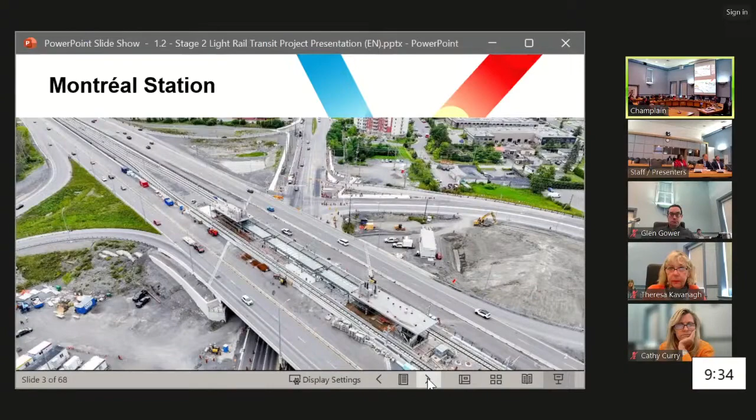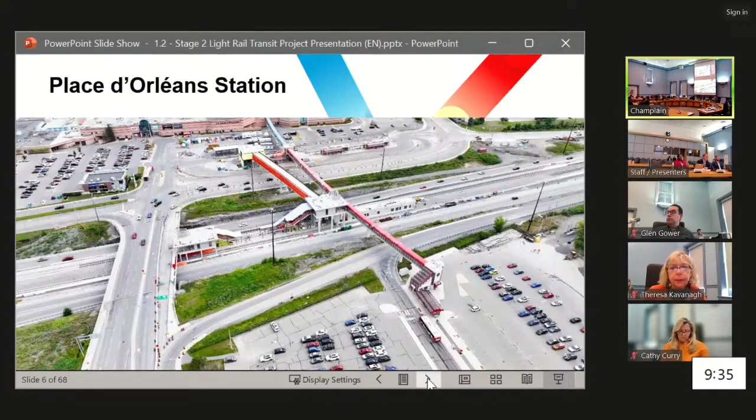So we're essentially putting those in now to future-proof the ability to come back at a later date with a pedestrian bridge. In terms of the look ahead on the east, on the next slide, we are working at all stations. There is good progress being made at all the stations. Rail was completed, and there's some final surfacing and adjustments being made.

The next big thing that you'll see is the overhead catenary system go up. A lot of the poles close to Blair are in place, but we're starting to pull the wires in. We need to make the connection from Blair all the way to Montreal station, and then at that point we can start doing some testing.

We are still trying to target an initial vehicle out to that area this year. We are seeing some pressure on the schedule - the Hydro Ottawa strike meant we needed power to the traction power substation at Montreal Road. Hydro Ottawa is back, good news, and so they are helping us, and we are trying to catch up a little bit there. So still targeting the first train movement out to the east this year.

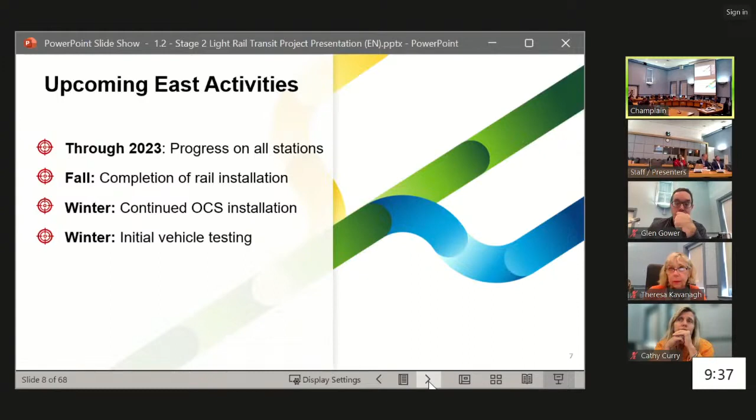Let's talk a little bit about the west. We've been making good progress on the west. The first location is Westboro, probably one of the stations we've really just gotten started on. A lot of work here, but soon you will see the station contractor mobilize in this area and start to get going. You'll see a lot of activity at this location.

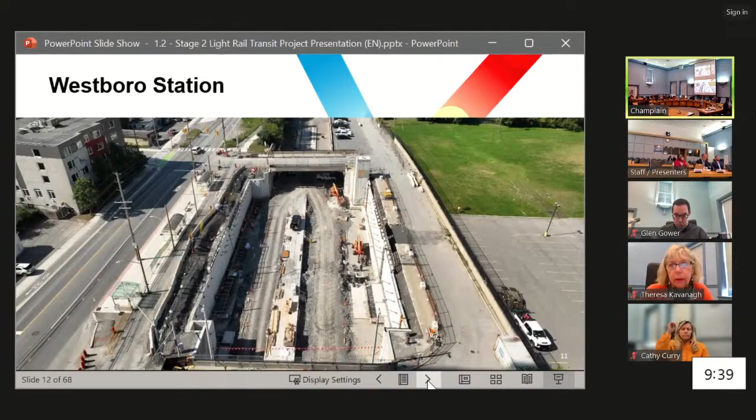We go down to the next slide, the Parkway Cut and Cover Tunnel.

We're in the mode now where we're over halfway complete to the tunnel structure, and we're starting to backfill. As you watch through these next few photos, you'll start to see them actually having covered up the tunnel. So we've definitely gone over the hump there in terms of the work activity, and we're starting on the downhill side now of trying to cover that up and finish it up.

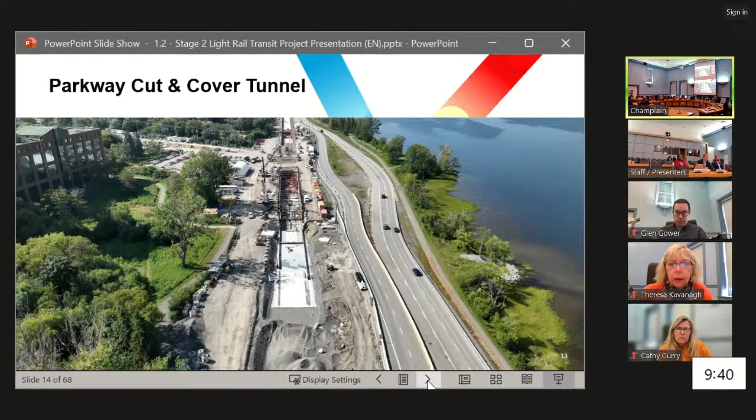This whole section along the parkway is planned to be closed in by the end of this year. There's 2 segments left on Byron Linear Park that are kind of later in the program, but those should be closed up early next year.

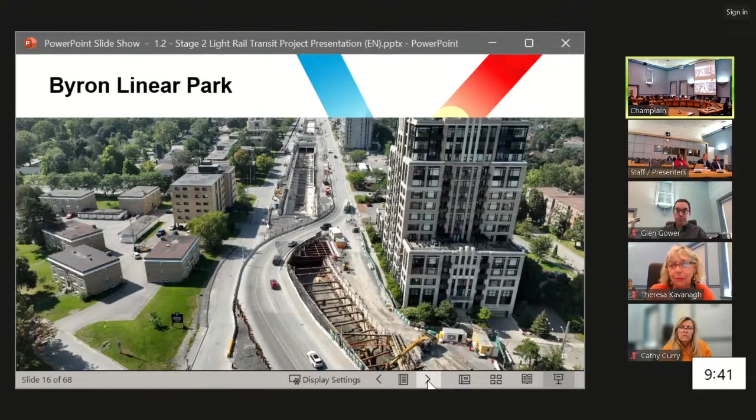Then the next slide, we turn the corner into Byron Linear Park. This is zone 12. What you don't see on the photo is the West Nepean Collector, which is a major city utility right under that location. So this is a sensitive area. We're taking our time so as to not disrupt that collector. But this will be one of the last sections to have the tunnel filled in and built out.

Next slide shows you a little bit of the fill in there, I think that's Woodroffe, where we've already taken out the temporary bridge and filled it in, and you see the tunnel there starting to fill in.

Obviously, the big thing that happens next once the tunnel is built is that there is a plan to essentially rebuild Richmond Road to make it a complete street. So we just spent the last 3 years digging through this area, and we're going to spend the next 2 years rebuilding Richmond Road to make it into a complete street, rebuilding the park, doing all the landscaping in the park. It's going to look fantastic when it's done, but still lots of work in this community in the years ahead, I would say.

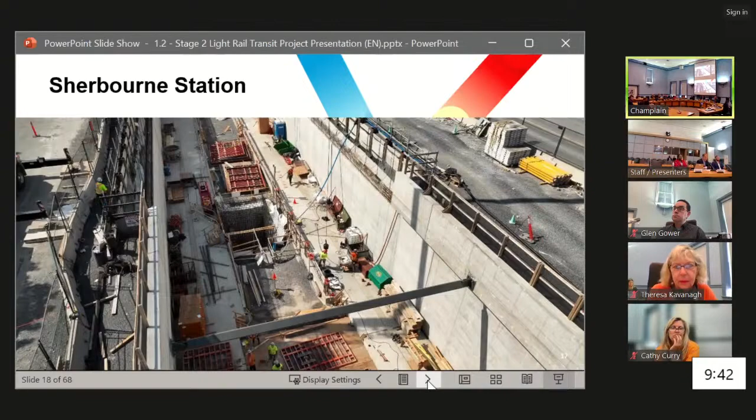And then once we get out of Byron Linear Park, then we're at the Richmond Portal. This is where the train comes out of the underground section up into the open air section.

Quickly to the next slide, you see Lincoln Fields. This is actually a three-track station, so this is one of our more complicated stations in terms of operations. On the left-hand side, you see a new bus operator building coming together nicely. Essentially the entire bus loop that's on the bottom, on the right of the screen, will be moved to the upper left. It's at a slightly higher elevation, and all the buses will use that top section. Again, we'll have a fare paid zone where people arriving at the station on the bus will be able to transfer directly into the station without going through fare gates. And then everything on the right at the bottom, that will all be dug up and turned back into park area.

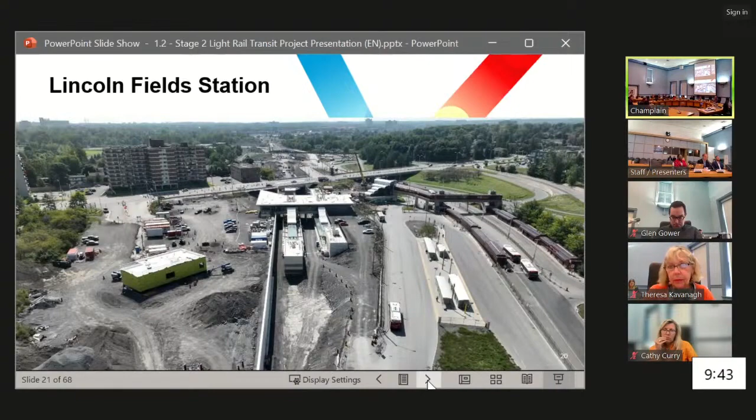We go a little bit further up to the next slide on Iris Station. This is following the leg up to Algonquin. This area from here all the way up to Algonquin Station is an area where we're actively putting in drainage and actively working on what I always call the sub-ballast. This area was highly affected by the big storm that we had. When we're in the middle of construction, we don't have the drainage systems in place, so getting a major flood is no good. We've absolutely lost some time in this area.

Previously the cut and cover was the longest path on the project. This is becoming a challenge for us as well, because basically a lot of the work that they did got undone by the recent storm. So pretty unfortunate, but we are moving ahead to try to get this work done as quickly as possible.

Algonquin Station, the next shot. Again, looking very good. I think Algonquin looks good. We have the pedestrian bridge in there, so they are doing temporary lane closures to get that work in place. Inside, they're doing finishing works. The main structure of the station where the trains arrive is actually underground at this location, so this is a conversion of an existing facility that was never put into use.

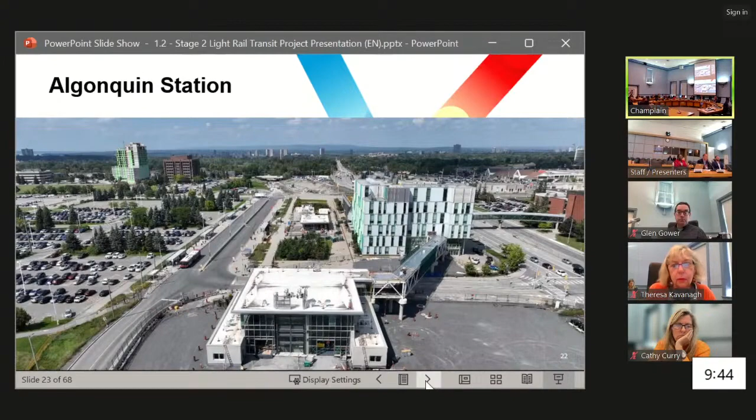Good progress there. Now if we go back, we take the leg - we just did the north-south leg to Algonquin. Now this is the leg that cuts off towards the west. We do have another small tunnel through this area that connects over to Queensview Station.

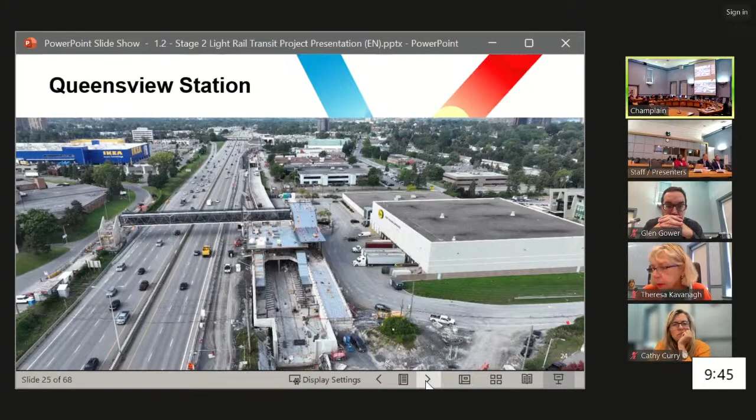So on the next slide, you see Queensview Station there, with the pedestrian bridge. Again, there are lane closures here required on the 417 to allow us to put in glass panels and other things. You see the station there is in very good shape, it's coming along nicely.

The next one at Bayshore Station. There was a bit of a challenge here - there is an underground tunnel to provide an additional emergency egress path, and that's the black spot you see in the middle of the page there. But once we have that piece done, we'll basically be able to connect track all the way through to Pinecrest, just about. So good progress there.

And then the next slide, Moodie Station, coming along nicely. Again, no major issues to report here. It's a pretty isolated location, so they're just working away, getting that station finished.

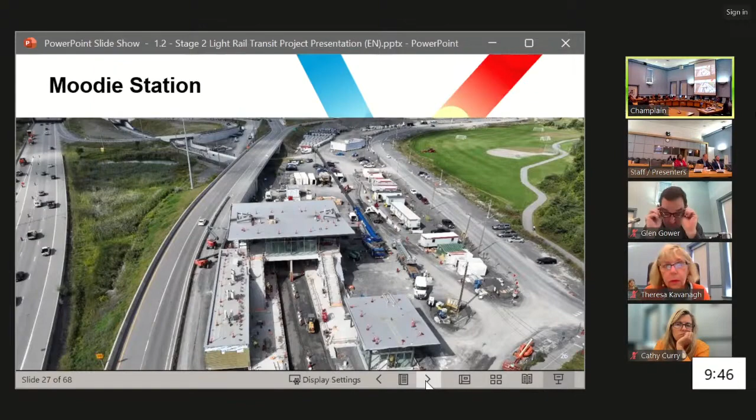And then the last one is the light maintenance and storage facility. They've moved in to put in track. They're going to work on track through the rest of this year and then start to put catenary in next spring. And then the plan is to truck one of the existing Alstom Citadis vehicles to this location to allow us to start testing at the facility.

Just in terms of the next slide, we talk a little bit about the look ahead. So it's really about filling in that tunnel, getting our first train trucked over to the LMSF in the spring or summer of next year to start testing. And we're actually going to test from west back to east because we need to finish the tunnel before we can test in that area, but we're going to try to mitigate as much as possible by starting in the west.

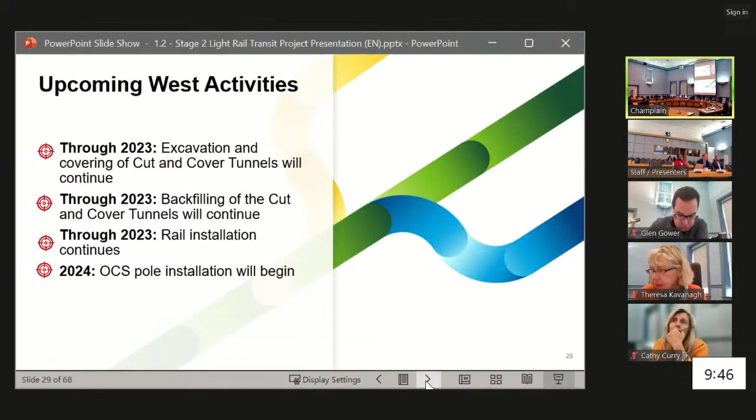And then I know we've talked a lot about traffic mobility impacts throughout the area. So we have a number of long-term closures. The one on this list that we're still tracking very closely is trying to understand when we can open up the Pinecrest interchange. We've closed the westbound off-ramp for a couple of years. We are working hard to open up a single lane westbound off-ramp, but it's going to depend a little bit on weather - if we get another big storm, that may affect the schedule. So we know there is interest in that lane reopening, and we are trying to do that this year.

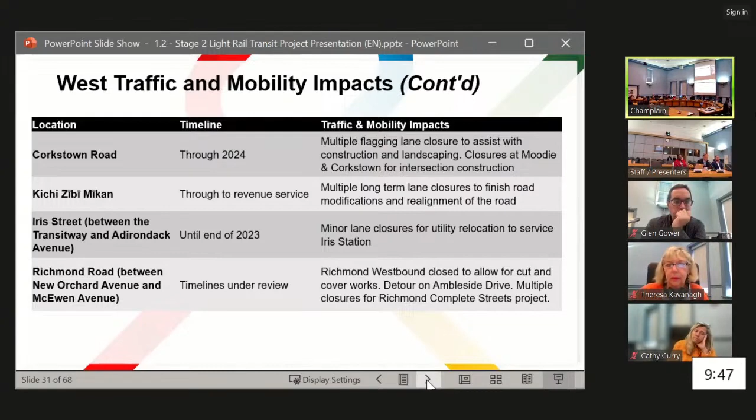And then just on the next slide, some additional impacts on the parkway and other areas. We are going to see a variety of closures on and off, and certainly when we have to rebuild Richmond Road, that will have a big impact on the work in that location. And then the next slide, if we just talk about schedule, still looking at the end of 2026 for the works to be completed. So that's a quick summary of where we are with the east and west.

Now we're just going to take a second here to set up with a video. So we have a drone flyover of the entire guideway, and it's really good at giving you a sense of the scale of the project, the amount of work that's been completed, and the amount of work that's left to go. So we'll bring that up, and then I'll give you a bit of a narration because this video does not have music. Yeah, so just settle in because it is 8 minutes.

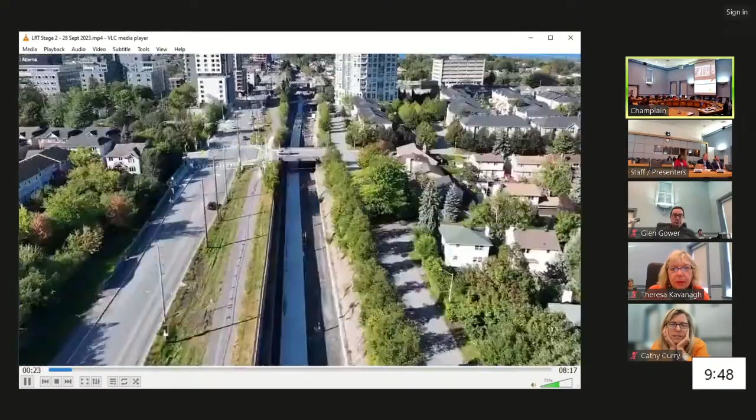So this is just leaving Tunney's. We start to, there's a big box culvert in the guideway here. That's on the left-hand side, that's the concrete pad that you see there. So we're going to be putting direct fixation track on that. Then the right-hand side will have ballast track.

You see we come through to Westboro Station. And then again, here's another big long section of transitway that's been converted, is in the process. So this section should largely be ballast. We get to Kitchissippi Station.

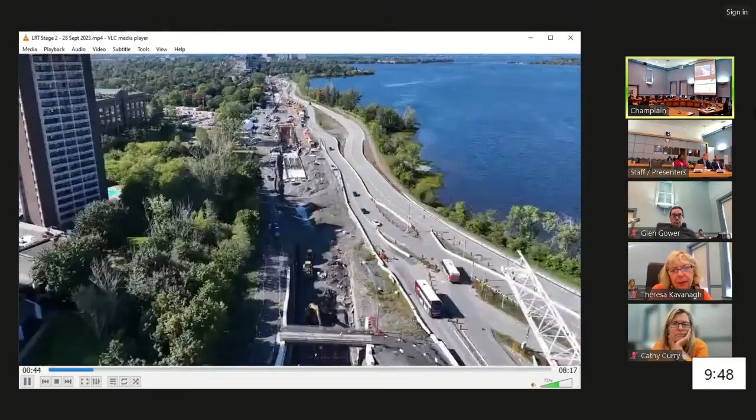And then we come out, this is where the tunnel portal will be, just at the start of the parkway. And then you see, here's a good shot of where we started to backfill. The white section there is the waterproofing, so that can all be backfilled now. And then there's a bit of an open segment.

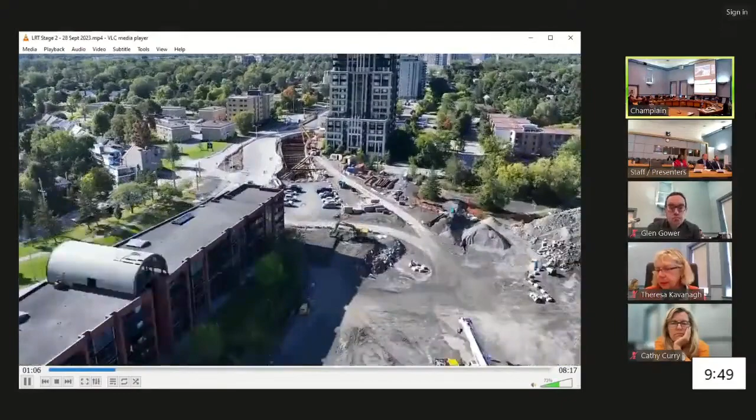This section here had a major east-west 1200 millimeter water main that took a lot of effort to resolve and work through. Another station.

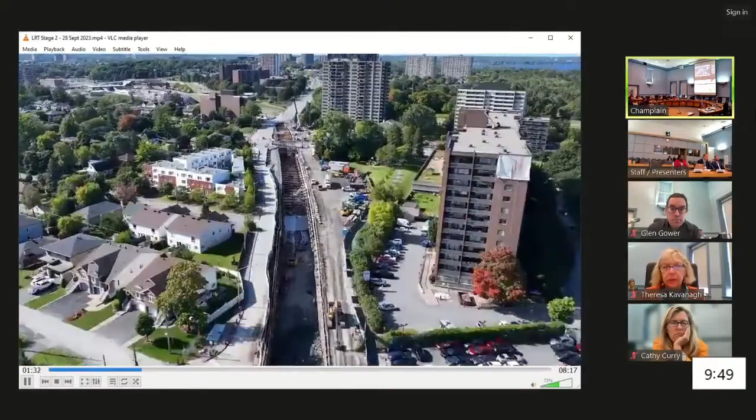And then you see a couple of small gaps here. This is where they're putting in, they have to do special concrete work to put in niches for the fans. So this whole area will basically have a tunnel ventilation system, a series of jet fans that are used to evacuate air in the case of a fire, a train fire. So highly unlikely, but that is kind of typical for these modern tunnels to have that system.

We turn the corner back through Lincoln Fields. You see there's a bit of a stockpile there that needs to be removed to build the guideway. Lincoln Fields Station.

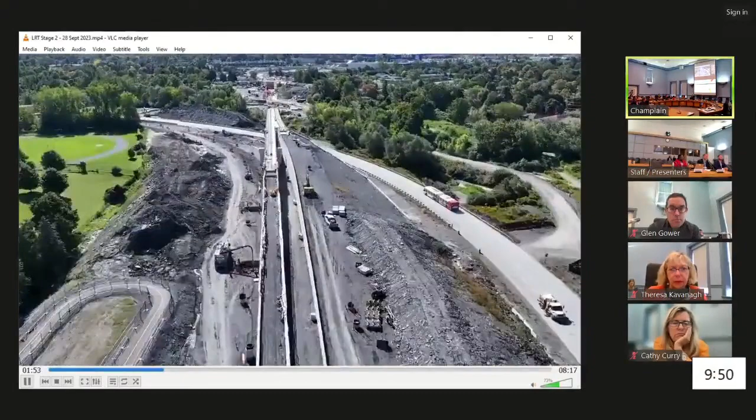The new pedestrian bridge that's in service now. So this is the flyover location. So this is where it splits from the two locations. And if we keep going through Connaught, there's roughly a 300-meter tunnel through here.

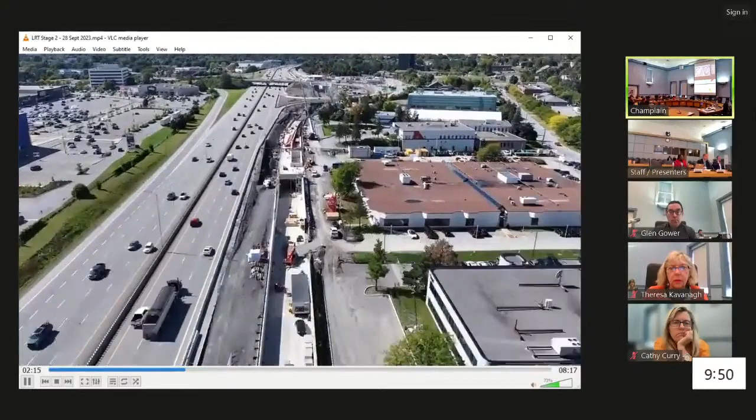Queensview Station, and then we'll come up on the final, the crux of the work to get the Pinecrest interchange open, right at this location. There's a final section of invert and tunnel, or box culvert, that needs to be created right at that location. That's what's holding us up in being able to open that up.

Pinecrest Station. And then there's a long section here where we've essentially taken the transitway, removed all the asphalt, we're converting it into LRT. So all the OCS poles, foundations are in place.

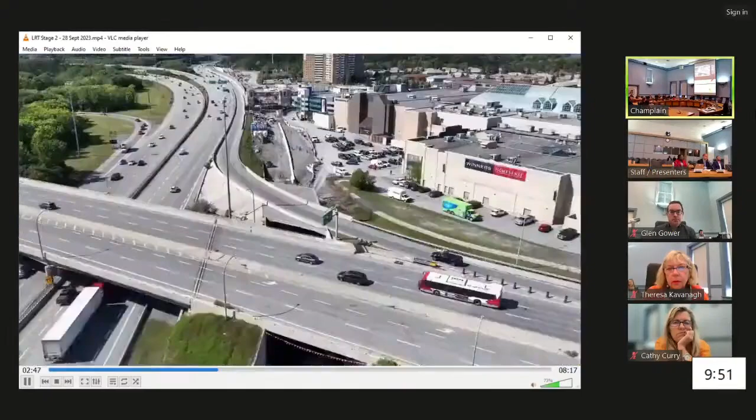They're starting to look at mobilizing track through that area. So there's a big open section there, which will be very good. They'll be able to make very good progress with track and catenary when they come through there.

Bayshore Station, so a lot of work integrating with the existing station. Holly Acres Interchange, so we still have some outstanding works there for connectivity, active transportation, a few other things still need to be finished up there.

Here you see the rail is already staged through this area. And so they basically have a wide open path from Bayshore all the way through to Moodie and the LMSF. So that's a big section. That'll be the first section where we see trains on the west. They'll be able to test through this section once they have the catenary systems installed.

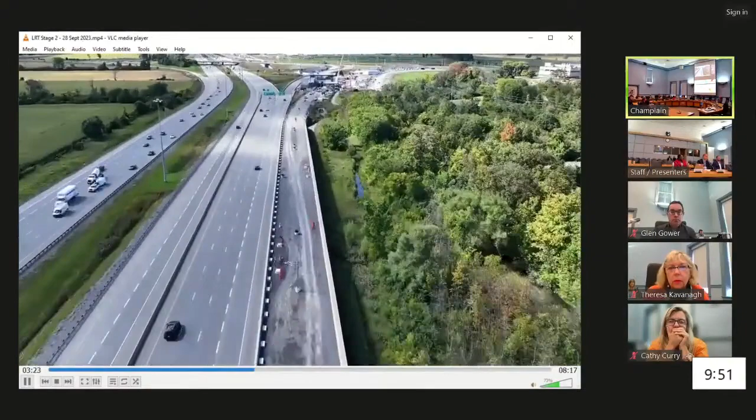Moodie Station, and then we've got a series of bridges that were put in place to get us under the interchange and into the maintenance facility.

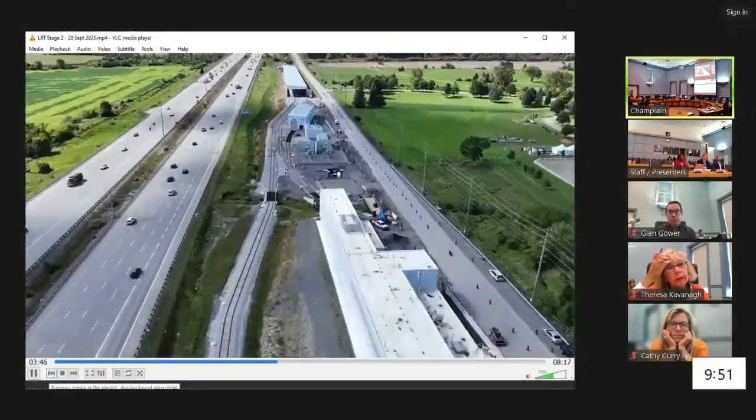The buildings themselves are due to be complete this year, with the yard and all the ancillary equipment, the catenary systems due to be finished next year.

So then we'll move, I think we'll go back to Iris now. Oh, so stay on the video. Told you it was long.

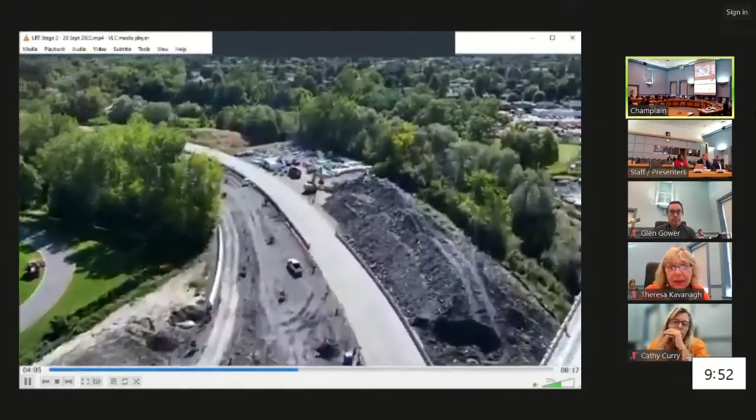There we go, perfect. So then we'll take the other leg north to Algonquin. So you see here where we've kept the transitway open, the road lanes on the side.

Then on the left-hand side, you see the OCS foundations are starting to be put in place there. So this is an area that was all kind of washed out and affected by the big storm, basically the entire section from Iris all the way through to Algonquin.

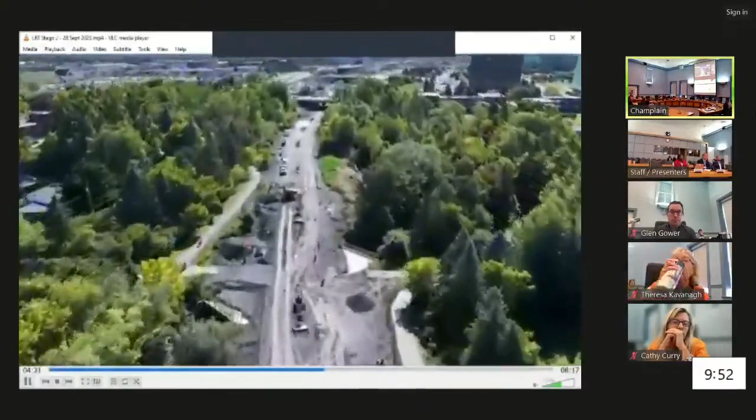So Iris Station is in good shape. You see the Pinecrest Creek on the right-hand side, which is now in its new location. So a lot of activity here. You see a lot of trucks and equipment moving through this area.

Then obviously, this is where there's the portal to the structure that's underneath Algonquin Station itself. And then we are putting in, there's a bus operator building up on the right-hand side, which theoretically could be handed over before the project's done.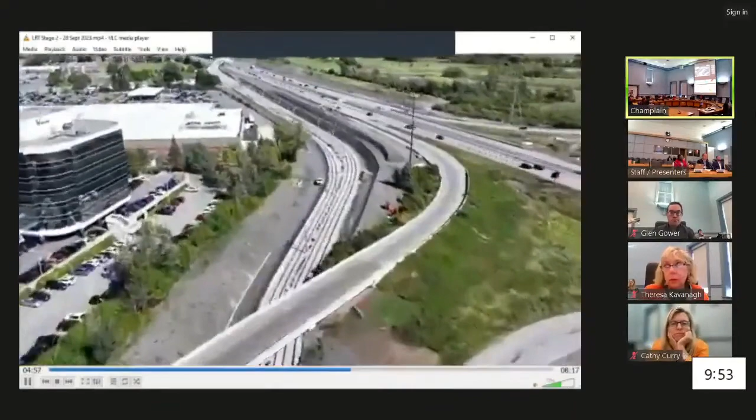So we move to the east. So Blair Station, that's the one tight curve in the east that we just passed over. Then we see a pocket track here. This is where trains can turn around, or we can add extra trains into service if the downtown core is busy.

The flyover that's getting into the middle of the highway, and then you see a very long stretch here all the way to Montreal Station.

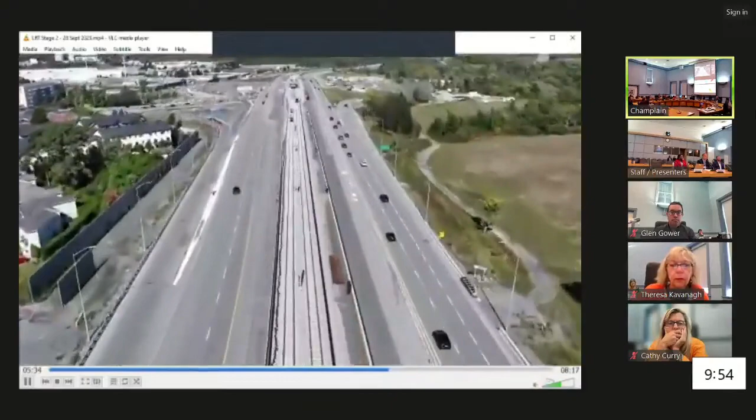Catenary poles are up in this area. There's a lot of work pulling the wires, getting them into place. As I mentioned, the traction power substation at Montreal Road is getting energized over the coming weeks, which is one of the next steps to allow us to put power on the overhead catenary and start bringing a train through this area. But as you can see, the tracks are basically complete through this section.

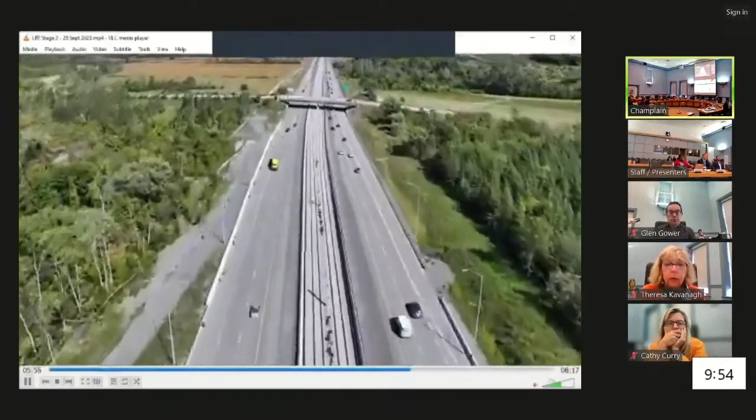Turn around the corner, this is us going through the green belt. Greens Creek Bridge is on the left-hand side, another additional pathway connection. That's still not open, it's closed because Infrastructure Services is doing rehabilitation work on the culverts under that bridge and area. Once that work is done, we can look at an opening date for that bridge.

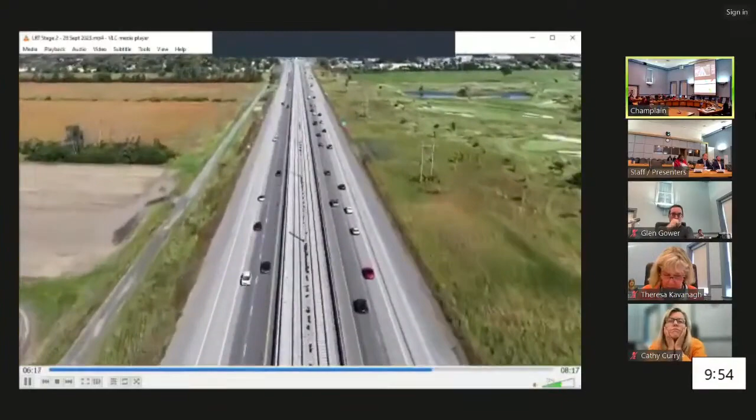So a long straight section here through to the second station in the east. We'll come up on a set of crossovers here. This is a location where, if there are operational issues, operations could switch tracks or do alternate single tracking through this area if they needed to. So that quickly passes through the station.

You can see there's still a little bit of the highway skewed to the outer edges a little bit. So at some point in the next two years we will come back and repave this entire highway and restore the shoulders, giving proper shoulders for the highway for winter maintenance and other reasons.

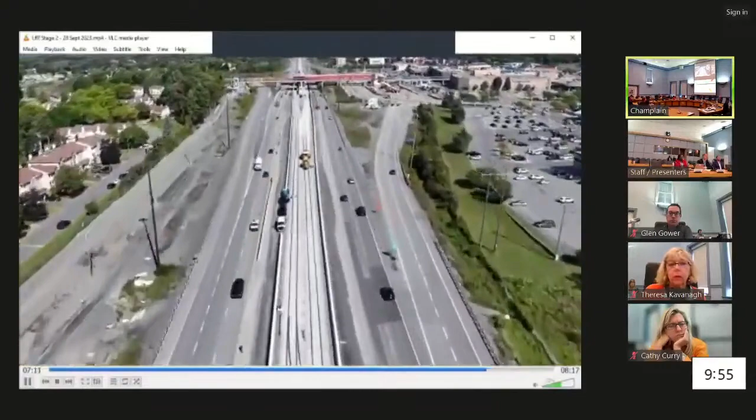And then Place d'Orléans is coming up. There's a decent amount of work at the station itself, but on the bus loop side there are a couple of buildings we're doing as well. So there's a fair amount of work through this area.

Then we have another long stretch here. Tentatively, on I'd say the 10 to 15 year plan, there's a position in this area for a 10th line station, if that ever comes to pass. So we've set up the track and the overhead catenary to minimize any interference that putting a new station in would require.

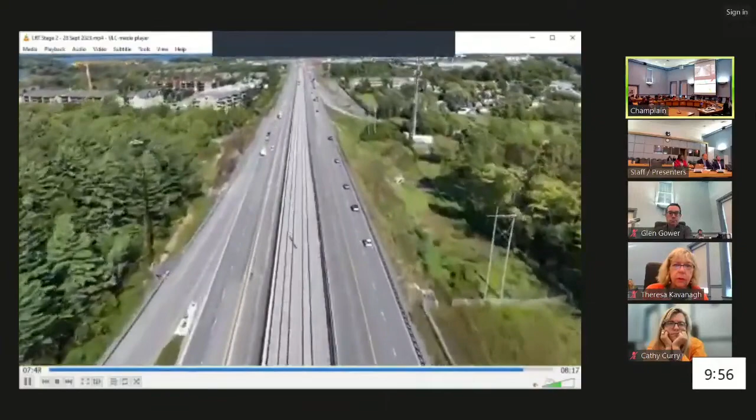Again, through this area we're still stealing some of the shoulder for construction activity, but we will slowly, over time, starting next year, begin to give that back.

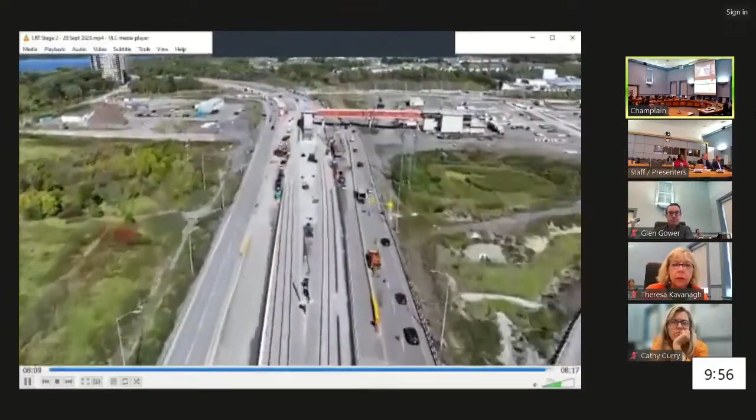And then the park and ride is in decent shape. The pedestrian bridge to get over the highway does need some lane closures to be able to put in the glass and other features. But the station itself is coming together nicely.

Very good, thank you for your patience as we walk through that. You can get a good sense of the scale of the project just by the amount of time it takes to run a drone over the area. It's a lot of work, a lot of activity, but very good progress being made in all sections right now. There are a lot of crews working, and certainly this great weather through September and hopefully into October will help us greatly keep going.

So if we go to the next slide, I'll talk to you now about the Trillium Line. I'll give you an update on the construction.

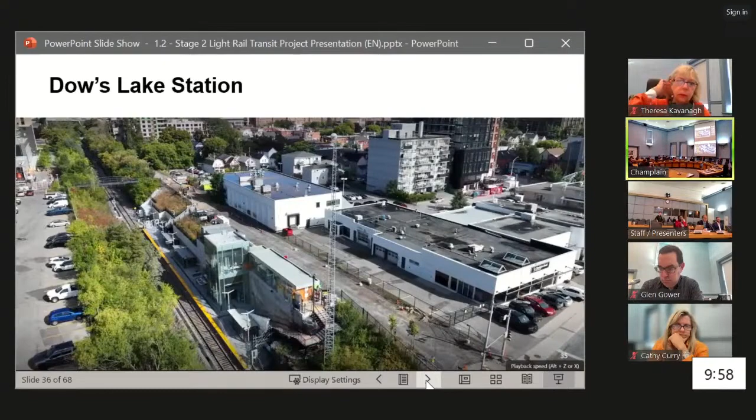So we'll begin the commissioning of the elevators and all the mechanical and electrical equipment at this location. The MUP through this area is closed - it's a very popular MUP - and they're working to get that reopened. At Carling Station, I asked the team when the public art is going to go back in, and we are still waiting for the public art to go back.

Otherwise, looking at this location, on one side they've basically wrapped up their landscaping or are coming to the end of it. On the far side, there's a lot of work still happening, where they're putting in soil cells and different things for the trees.

Walkley Station, the next slide - this has always been one of our most advanced stations. You see now the connection is in place from the multi-use pathway through to the development. I know there's been a lot of questions about that connection, so that's in place. We're looking at getting occupancy for the station and getting the elevators commissioned in the coming weeks.

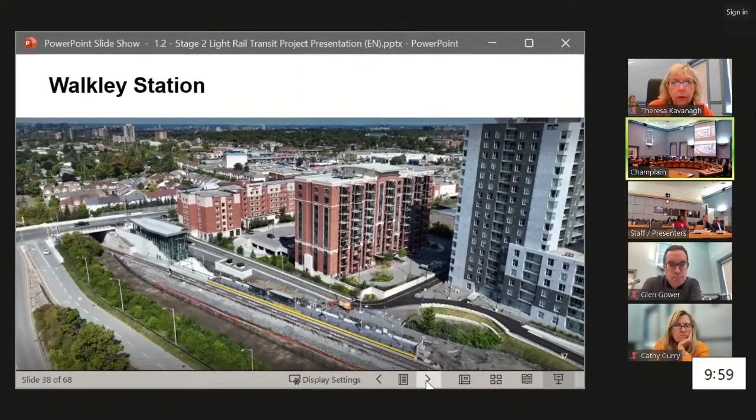Albion Yard is next - very good shape. In the foreground is the train inspection building, where vehicles will be fueled and sand added. There's a wash building, that small rectangular building in the middle of the screen, so they'll be able to drive the train through and get it washed. The new building in the distance is the new maintenance facility, where they will do all the heavy maintenance - they can turn the wheels and do all the inspections on the roof.

Continuing down to Greenboro Station - you look at the station and the right-hand side is where they used to have the construction staging. They're now in the process of handing that back, restoring all of the adjacent areas back to their normal state.

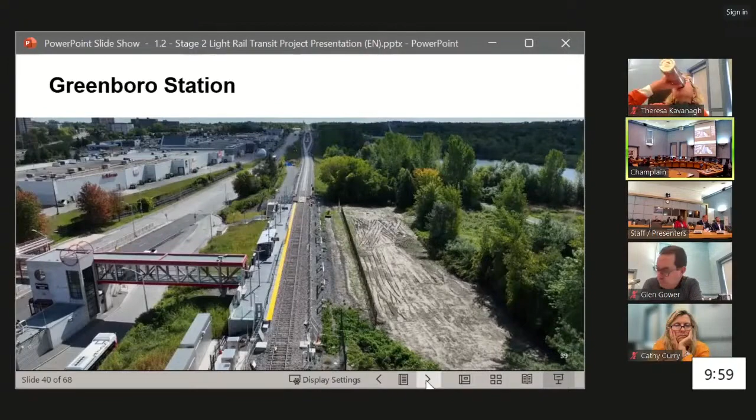South Keys Station, again another station where we were waiting for power - we do have power at this location now. So we've got a tick in the box for all the stations to have power, which is very good. That allows us to move on and start commissioning things like the elevators.

If we go to the next slide at Leitrim Station - Leitrim Station itself has been very good. You see they're starting to put all the pours in place for the bus loop, and this is the loop where if you arrive at the station by bus, you can basically walk directly into the station without having to pass through a fare gate. If you arrive in the parking lot, which is the upper half of the picture, that's where you'll have to pass through a gate to get into the station.

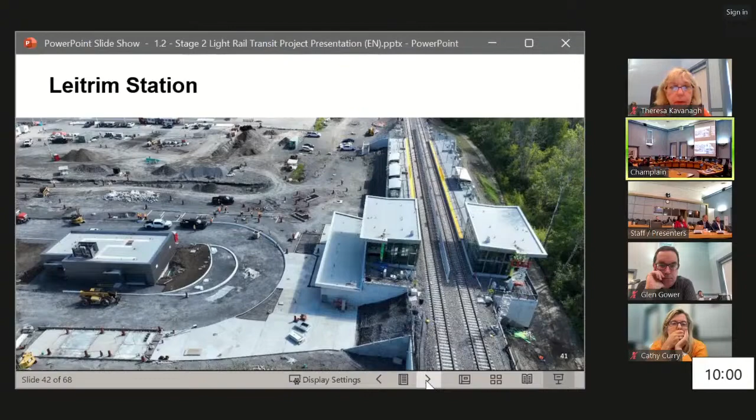The next slide, just looking at the bus loop a little bit more - this is just another view. The bus loop's there, so the curbs are in place, and they're slowly moving their way around with the concrete sidewalks, planning to come in with paving in October.

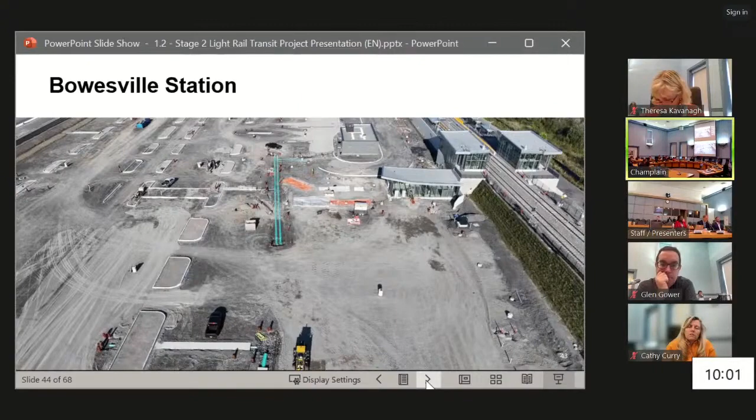The next slide on Bowesville - similar situation, the station is in a very good state. You start to see all the cells there. The next slide gives you a higher level view of the different work required in the parking lot - the big thing here is to get the paving crews in. This gives you a sense of the size of this parking lot, park and ride - it's a very large park and ride. Still a lot of systems to go in, cameras and different things, so on the communication side we see a lot of work there, but the biggest thing now is to get the paving crews in.

And then Limebank Station at the end of the line - again in decent shape, still focused on the bus loop as well as the Main Street connection, making sure people can get to the station when it opens.

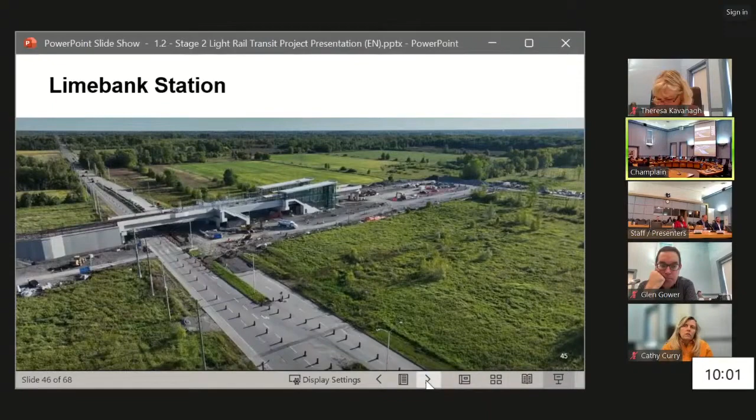If we flip over to the other segment on Uplands - Uplands is in great shape. On the bottom left you see there's a free-flowing pass-through for pedestrians, and that would go to a development at the bottom of the page, or any future building that would be there, and then you'd pass through there to get to the gates to get up to the station.

And then the last one is just Airport Station. It's been in very good shape for a long time. There was a little bit of a rework of one of the tracks at this location just to fix a weld, but otherwise we're doing very well.

We're pretty happy with the state of Airport Station. Fare gates and everything are installed there.

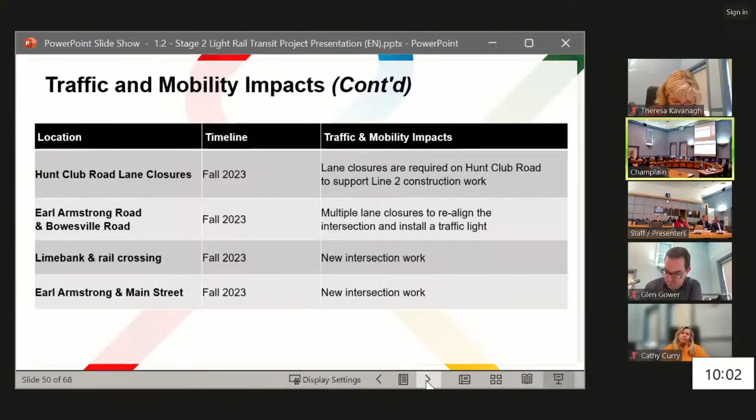We're going to switch to the video very quickly. Again, we have another video that gives you a sense of the overall system and the scale of the project. From there, I'm going to hand it over to Justin Karosky to take you through a line by line of the various things that we're tracking.

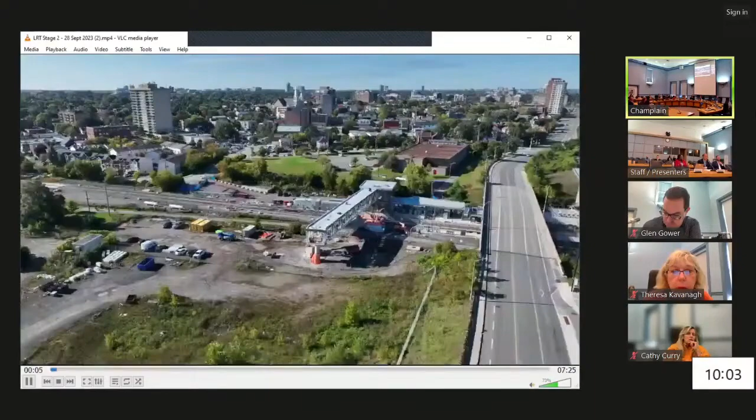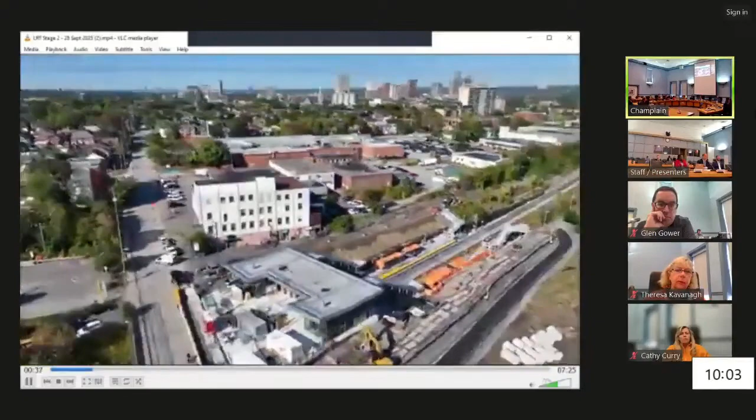We go through Corso Italia first. On the left-hand side, you see that's an OCH development, and on the far side, there's a future private development. Still a lot of equipment staged at that facility, but it's in very good shape generally.

In terms of track, they're doing some final cleanup and surfacing and running trains. So we do have some final work to be done, but generally all the track is in place and trains can run end to end on the line.

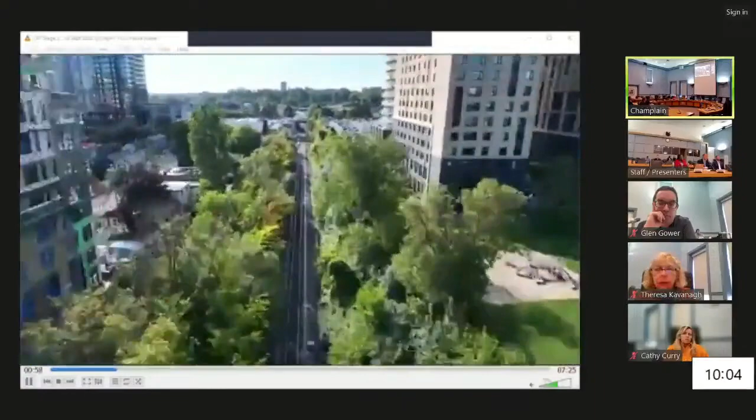We get to Dow's Lake Station in good shape. Now that we have power on, we can start commissioning all the mechanical systems and the electrical systems. That's a big step forward for us.

You see the multi-use pathway there. They're starting to approach - I think the curbs are in place now - and so they are scheduling the paving to come soon.

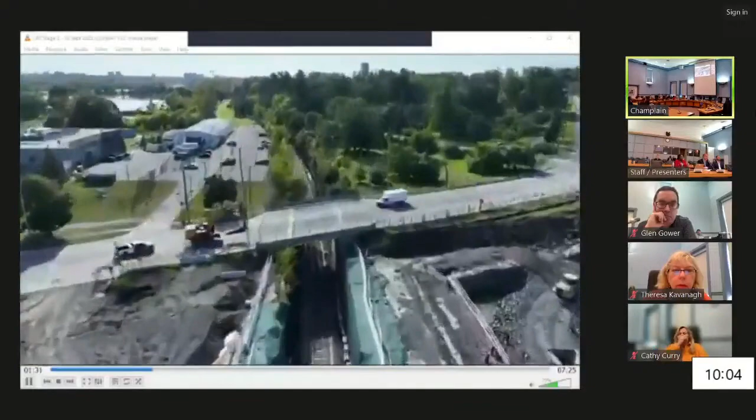You see a bit of a shot of the hospital parking development there. That's going to be over the guideway, so they are actively working on that.

Back through the single tracking section that goes from Dow's Lake all the way to Carleton. So there's the Carleton parking garage. Double tracking starts again. And then we get to the station.

Again, the station in the foreground, you see the landscaping is very advanced. On the other side of the road, you see they're still doing a lot of work putting in soil cells and things to get ready to plant trees through this area.

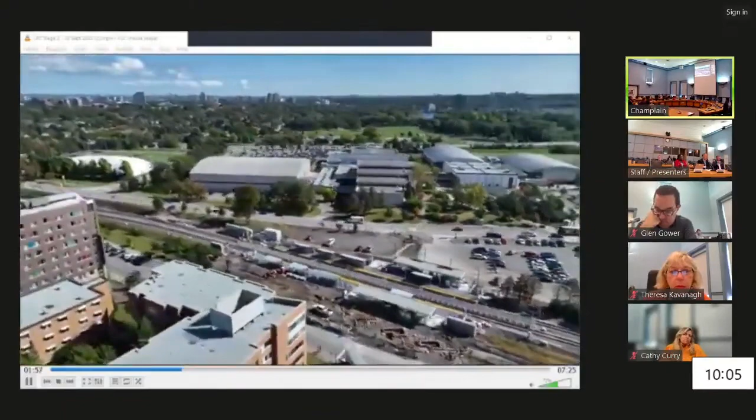And then the double tracking continues. There's the rail bridge and then the Rideau River pedestrian bridge. So the concrete has been poured on the deck. We're working on the approaches now to the bridge.

The approach on the north side has the most work. You see the concrete pumping truck there. Then we need to add the handrails, the electrical for the lighting, and then that bridge could be put into service. Optimistically end of October, early November to open that up.

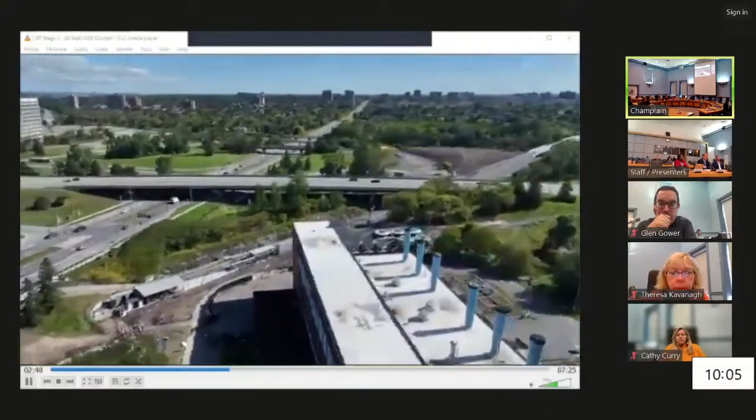We keep going through this single tracking section down to Mooney's. So Mooney's Bay is in very good shape. Just working on the connecting multi-use pathways and trying to make sure that we're ready to go for when the train service runs. So it's in decent shape. And this whole area is subject to a future development as well.

Big change in the project was adding the flyover there over the VIA tracks. And then we go into the Brookfield siding, the double tracking section, which has been lengthened. We have a bit of cleanup to do on those walls because there's some graffiti.

Then single tracking over to Walkley Station. Walkley's in very good shape. Again, here you see that they're basically down to landscaping and other activities. So it's cleanup, and they'll do the final commissioning on the stations, which Justin will speak to you about.

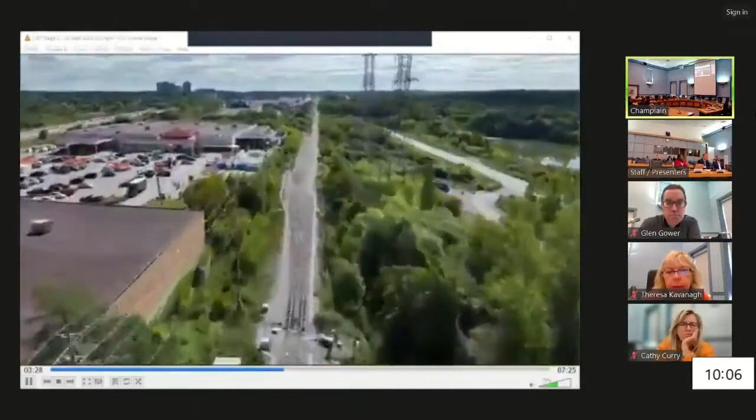Then from here, we'll split off and go into the yard to give you a sense of its size. There's the inspection building, a very good feature that TransitNEXT added, and the wash building, which is the main facility.

There's the admin building for our staff as well as the maintenance staff. And then this is the old Walkley yard. We are retaining the land and some of the track, but we'll have to demolish some of the buildings in the future.

Greenboro Station is in good shape. And then this is our split to the 3-track, where the train will turn around when coming to and from the airport, South Keys Station.

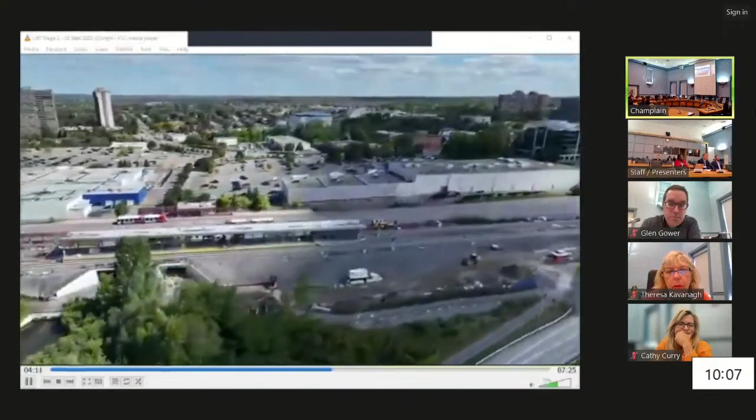A couple of underpasses there. One won't be in service until the future, but one will be in service once we open the line. And then Hunt Club, there's a pedestrian bridge on the left-hand side which we're trying to put into service.

You see this pathway that follows - this will be a stone dust pathway. That's essentially the original Osgoode Trail, so that'll be handed back.

We follow the train over to Uplands. This is the passing siding over the parkway, getting into the double track station at Uplands.

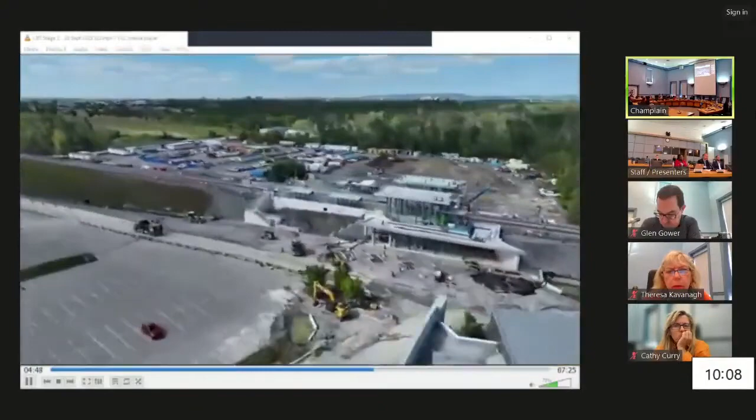Again, they're onto landscaping now and different things, working on soil cells for the trees.

Yep, the EY center there, and the just adjacent NRC testing facility. This is up into - I was impressed by how close this drone operator was able to get to the station, but they must have special permission that day.

Continuing further south, there are a couple of pedestrian crossings that we need to add to get across the road there. You see the NRC facility on the left. Again, a long single tracking section.

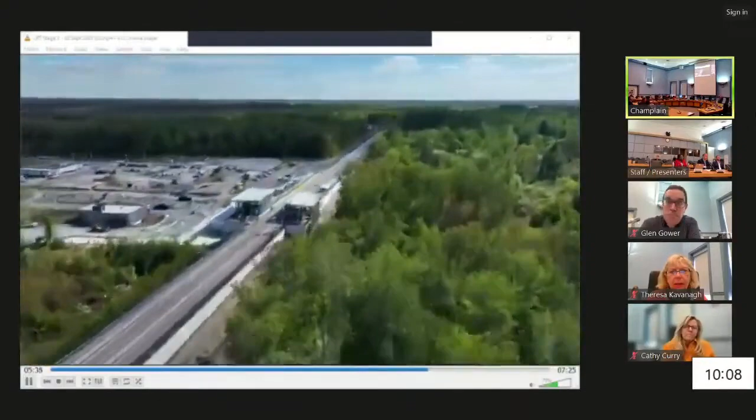Opening up for double tracking just as we get to Leitrim. So it's double tracked all the way from Leitrim back to Limebank Station, which will be very good from an operational perspective. You see the works here.

There's a temporary bus loop just on that side - a lot of activity through this area to get the bus loop in. Critically, we need the bus loop in service first, and then from there we can finish off the park and ride to give people spaces to park.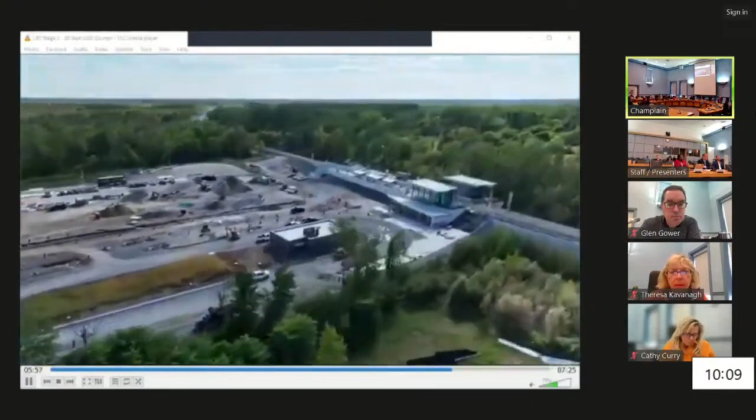Again, this is a very long section. There's High Road, which we're putting into service soon. Double tracking - you get a sense of where the community is going to be built out here.

So obviously this is the big park and ride. You see the realigned intersection just coming into view now - Bowesville Bridge.

This was intended to be a very large, highly used park and ride when it was originally envisioned, so we'll monitor its use over time. But the curbs being in place is very good. Then double tracking through to the end.

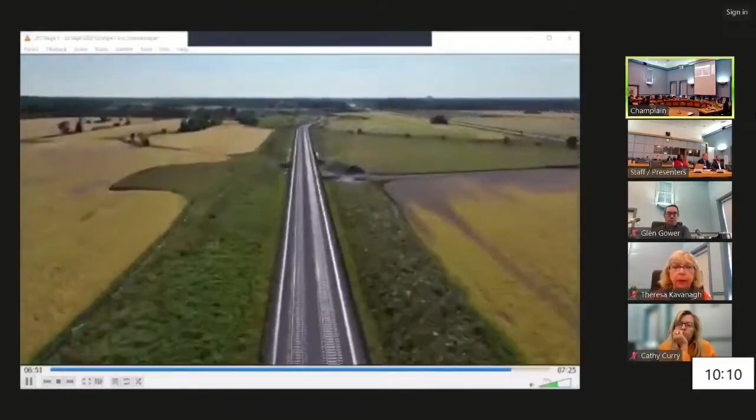Again, this is all owned by a developer, and if you go to a satellite view, you can really see the housing that's moving through this area. Right now it's very much greenfield, but in 10 to 15 years I expect it will look very different.

And then just the final approach up to Limebank Station. There will be an intersection here for buses to get in and out of the bus loop, and there will also be an adjacent connection over to Earl Armstrong.

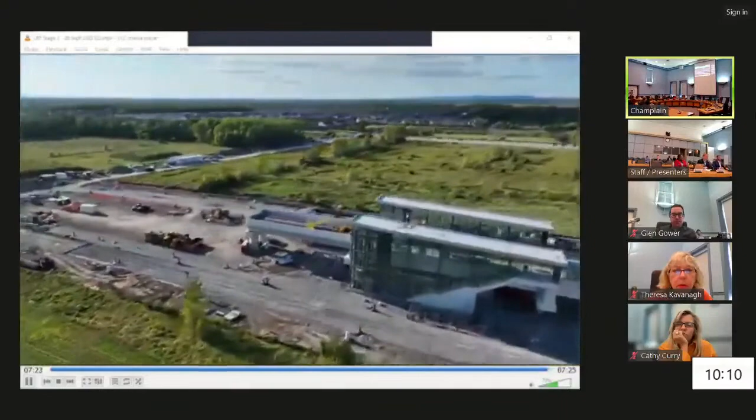So that's essentially the extent of the construction. That gives you a good sense of the area. I do try to give you a regular update on where we are with train testing.

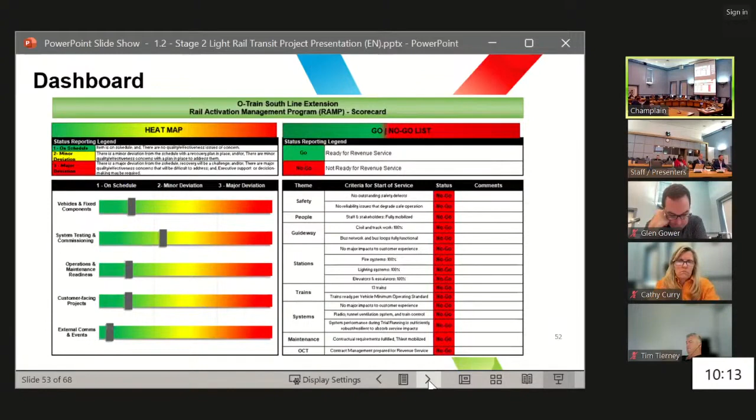This slide focuses on vehicles and fixed components. Vehicles, both Lint and Flirt, are in good shape. They're undergoing testing, most of which has been done, and now we're integrating them with the signaling train control system.

Guideway structures, including road bridges, rail bridges, pedestrian bridges, MUP bridges, are all pretty much complete. We saw some pictures where we're still working on a few, but in large part, they are either 90 to 100% complete. Civil guideway works, track works are largely complete throughout the entire alignment.

And then the OC spaces, so bus operator buildings at the various park and ride bus loops, rail supervisor offices, and rail operator rooms are all prepared and ready for us to go in and fit them out. We've started in some cases, planned, procured the equipment, and in the coming months will complete that work.

This portion we've broken down into stations in the top section, then park and ride bus loops, and then the MSF at the bottom. So stations, you'll note, are a little bit of a minor deviation from where we'd like to be.

Right now, we don't have any occupancy permits from Building Code Services for the stations. We are working on those. The 2 stations in red, Dow's Lake Station and South Keys Station, had some challenges with energization due to the Hydro Ottawa strike. Good news, which is contrary to this slide because it was made just before it happened, but we have now energized those stations and we'll be progressing with the remaining system installations, testing and commissioning, which had put the progress a little bit further behind on those stations.

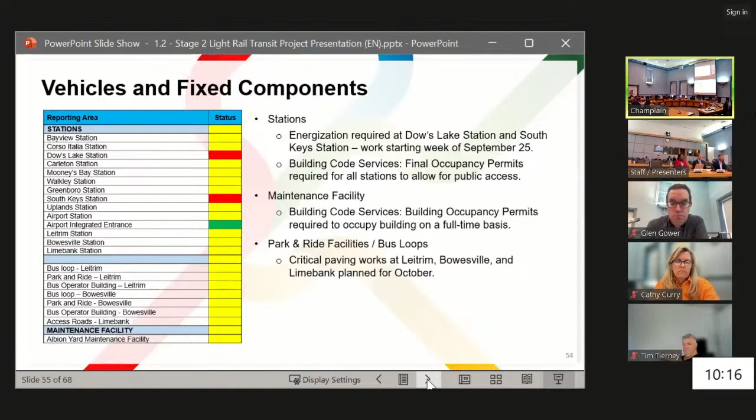The maintenance facility, also in yellow here, does require a bit more work. They're finishing some grouting on some of the rails to allow access for the trains into the service and inspection building. We're working on fuel system testing and commissioning to ensure that we can fuel the trains as we progress to 9 trains and through into operations. So there's a bit more work there, but it's coming along well.

Next slide. This section of the testing and commissioning scorecard is a city scope of work. The city is responsible to implement the head-end system, the P25 emergency radio system, and the cellular system in the Dow's Lake Tunnel. All 3 of which are largely complete - the head-end is largely complete, P25 radio emergency system is in very good position, and the cellular in tunnel also in a good position for completion and as planned. So we don't have any concerns with the completion of these elements.

Next slide please. This section of the scorecard looks at the system installation and commissioning of the systems within the stations and maintenance facility. Systems in the station and maintenance facility include the CCTV cameras, telephones, the e-tels, the emergency telephones, the information telephones, passenger information displays, intrusion access control, etc. The variety of systems we need in the stations to keep passengers informed and safe, as well as for us to operate the system.

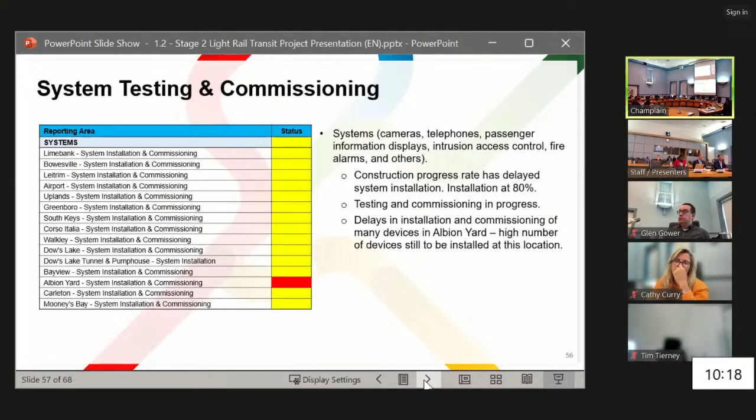The one element you see here in red is the Albion Yard. There's still a lot of systems, a lot of cameras, a lot of system elements to be installed. And it's a critical facility for us. So we're monitoring that closely and working with Transit Next to ensure that the progress is focused on that facility and will be ready to maintain the system during operations.

Next slide, please. So here's where we get to the more technical testing and commissioning of all systems. So I'll run through this a little slower because it is fairly technical in nature. At the top, under testing and commissioning, we're looking at the project-wide systems. So this is systems throughout the project rolled up into essentially 2 elements, the SATs and the SITs.

So the SATs are system acceptance tests, and they need to be completed before the system integration tests can go forward. The system acceptance tests in the field are largely complete, but we wanted the progress to be a bit further ahead than where we're at. We're waiting for the reporting to come, and then the system integration tests can start. Again, we wanted the progress to be a bit further than where we're at right now. And it's understandable. There's a lot of unforeseen elements that come up when integrating a variety of complex systems together. So that is why both of those are red.

Moving on to the train control system specifically, there's a variety of system acceptance tests required. Static tests, on the signal heads themselves, on the automatic train control and the ATS consoles, vehicles and how they're integrated with the signaling and train control system.

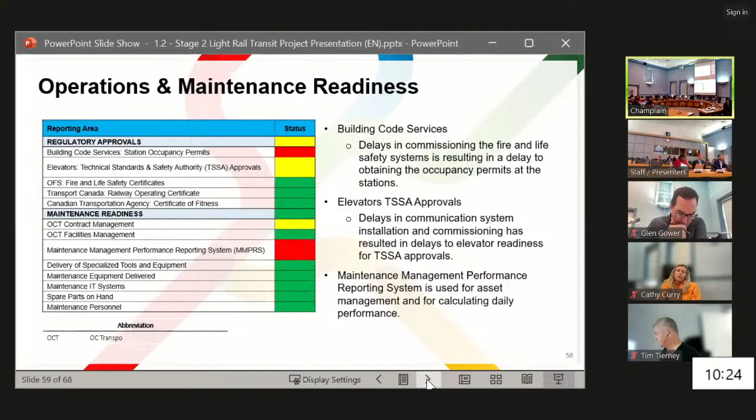a high familiarity with the system and all its elements, so we anticipate a good transition. They are also in progress of training all the staff in what they're required to maintain the system. And then in terms of train maintenance personnel, a lot have previous experience with the Alstom trains, so we have experienced maintenance personnel who were onboarded by Transit Next to ensure that we have seamless train maintenance as well.

Next slide, please. In terms of operating plans, procedures, they are largely in place at this point. Standard operating, emergency operating procedures are largely complete. TOCC diversions are planned to be complete this month, ensuring that degraded modes of operation run well.

For safety and security certification, there's a whole litany of requirements, both with Transport Canada and internally, to ensure that we have a very safe system. I'll highlight a couple of the critical ones. The Engineering, Safety and Assurance Case, also known as ESAC, Part 1 and 2, are largely for Transport Canada, and they are in a good position.

We also have our operator and maintainer safety cases. We have independent safety assessments, audits, and then our safety management system and security management system, both or all of which are in good position and ready to go as needed for our Transport Canada approvals and operations.

Full-scale exercises are prepared. Pre-launch coordination, live testing is in some elements - for example, tabletop exercise is complete, other elements fully planned. Trial running program is very advanced in the planning, and as we complete the signal testing commissioning, the training of the system, the completion of the stations, we'll be ready to go for trial running.

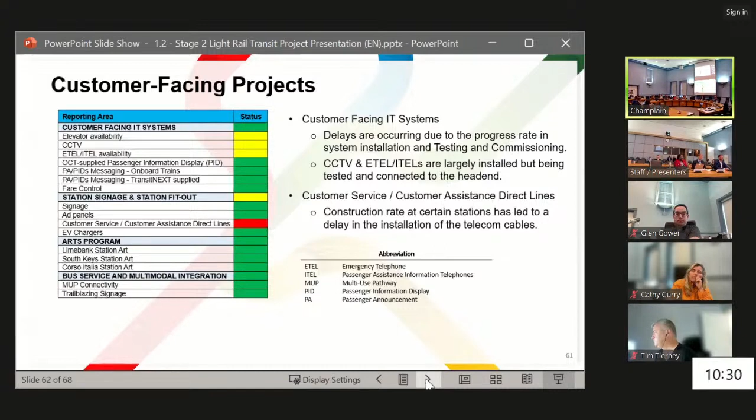Our arts program is looking good. I can't wait to see it connected and lit up. It's going to be a very nice art program throughout Limebank, South Keys, and Corso Italia stations. Our bus service and multimodal integration are all trending well.

The last section of the scorecard is our customer readiness campaign, including a variety of events as we move towards launch. Customer marketing and readiness, as well as station customer information content, are all trending well, and we are ready to go as they're needed.

I don't have a slide for this next section. I just wanted to give a quick update on the peer review that we conducted, in large part last year. It was presented, I believe, at the May Light Rail Subcommittee. We had roughly 11 items that were still in progress.

We are moving forward with those. A lot of those elements are being tested right now throughout the testing and commissioning program - for instance, ensuring that headways are achievable and that we can carry the desired passenger count. Other elements, such as guaranteed emergency brake testing and some vehicle acoustic testing, have been completed at this point.

So in large part, progress on those items is progressing well throughout the testing and commissioning phase. We've completed roughly 3 of them, and we will continue to update you as we complete those tests.

As we move forward, we'll get to test some of this through the winter and see how that goes, leading up to launch. Michael, I'll hand it back to you.

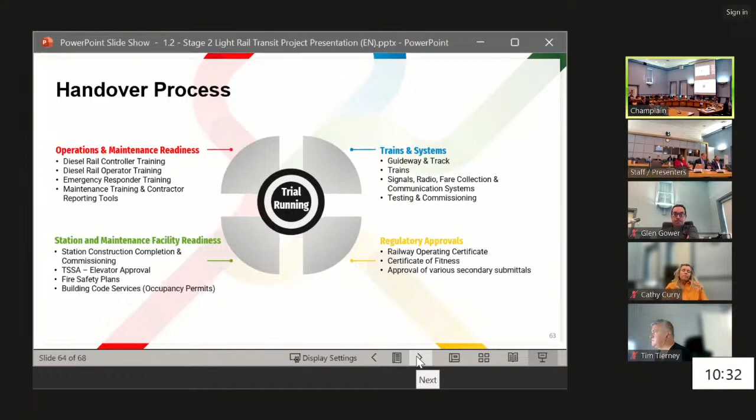And then, in terms of the handover process on the next slide, it's a bit of a roadmap for where we go with these projects.

Once the system is ready, we would do the trial running. As you recall, trial running is a 21-day period on this contract, 14 days where they need to meet the 98.5%. Once we have that in hand, then we can go for substantial completion.

That trial running unlocks the final issues related to the safety case. It's the final demonstration that the system is safe. That allows us to close out the engineering safety assurance case.

From there, it's the handover to OC Transpo to determine how much time they need to get ready to do additional training, to hand over, and to go into passenger service.

And so there's a couple more slides left that deal with questions and ways to get in contact with us. But I thought I would just leave this last slide up, and I'll hand it over to Renee for her final notes on this. Merci beaucoup, Michael.

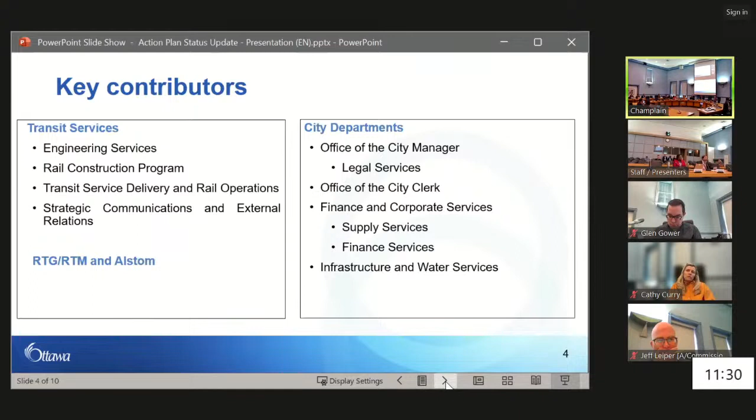Within the city, the Office of the City Manager and Legal Services were involved in the response. The Office of the City Clerk, Finance and Corporate Services - in particular Supply Services and Finance Services - had roles to play in updating city policies, and Infrastructure and Water Services has a key role to play as the main city project manager when it comes to major infrastructure projects. Next slide, please.

So to speak to our progress to date, we've been fostering successful working relationships. The relationship with RTG and RTM and Alstom has improved. We saw this over the summer.

Accuracy, transparency, and public entity decision-making have been looked at. We have increased accountability through the reporting structure through this subcommittee, as well as our ongoing reports to the Transit Commission and to Council. We are preparing for a successful handover of O Train Line 2 and Line 4, as we've just heard, and we're providing regular status updates.

And the recommendations for the Confederation line, line 1, we are bringing an analysis report regarding the axle bearing work that's been done to Transit Commission in October.

Transparency, of course, was a key theme of the public inquiry, along with communication and collaboration. TSD is working with stage 2 contractors to ensure that system integration is overseen centrally.

You'll recall that we spoke in April when we presented the initial plan about the role of the independent certifier, the independent safety auditor, and the systems integration verifier who provide additional oversight, which is in line with the recommendations.

We're bringing an axle bearing analysis report to the October meeting of the Transit Commission, as I mentioned, and staff have made consistent efforts to ensure transparency with council and the public. We're providing regular updates to this subcommittee, to the Transit Commission, and to council.

We have created a new commitment to transparency section on our octranspo.com website. That contains all of our council memos, all of our reports and presentations, including this one, reports on our key performance indicators, and a copy of the action plan, which will be updated as we update you.

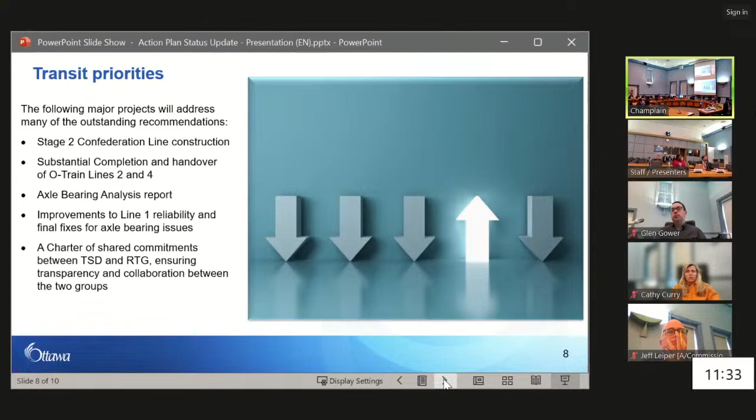Substantial completion and handover of O train lines 2 and 4. The axle bearing analysis report that's coming to the Transit Commission. Improvements to line 1 reliability and final fixes for axle bearing issues, which will be discussed in October. And a charter of shared commitments between TSD and RTG, which will ensure transparency and better collaboration between the two groups.

So for next steps, progress on our recommendations that are outlined in the report and this presentation will be updated and made public on ottawa.ca and octranspo.com in our commitment to transparency section. All of the recommendations are expected to be complete or substantially in progress by the end of 2023.

We will provide another update to this subcommittee either in December or in early 2024. We'll continue our collaborative work with our partners to improve service, and we will continue to make updates on Stage 2 construction and our ongoing rail operations to Light Rail Subcommittee and the Transit Commission.

That concludes my presentation. I'm happy to take any questions. Thank you. Proceed to questions.

Councillor Gower. Thanks, Chair. Have either of the other levels of government made a formal response yet to any of the recommendations of the inquiry that we're aware of?

Chair, no, not that we're aware of. And I know that you've sent them a copy of the action plan. Has that been acknowledged, or has there been any formal or informal conversations from the other levels of government?

I believe there was an acknowledgement, Chair, but I don't know. I'm not able to speak to any substantial. Certainly, there's been no substantial discussions with Transit Services on the implementation of the recommendations, but we do know that they are aware of them.